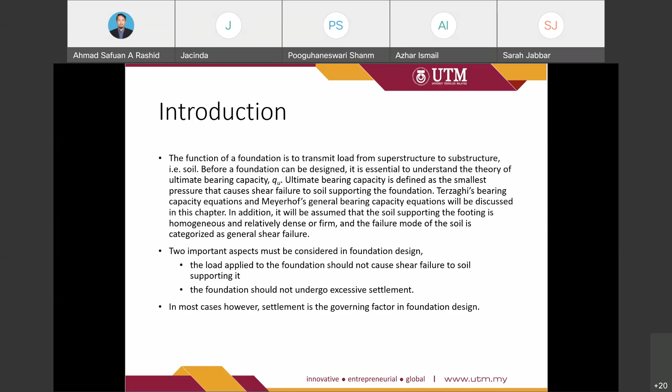So the static bearing capacity of foundations has been extensively studied and reported in the literature. However, foundation can be subjected to single pulse dynamic loads which may be in vertical or horizontal directions. So the dynamic load due to nuclear blasts are mainly vertical, and from the earthquake, the horizontal dynamic loads on the foundations are observed.

This type of loading may induce large permanent deformation in foundations. Isolated column footing, strip footing, mat footing, and even pile foundations all may fail during seismic events. Such failure are generally attributed to liquefactions. The meaning of the liquefaction is a condition where the mean effective stress in a saturated soil reduces to zero, so it means that the soil will behave like a liquid or like water, because the effective stress is reduced to zero.

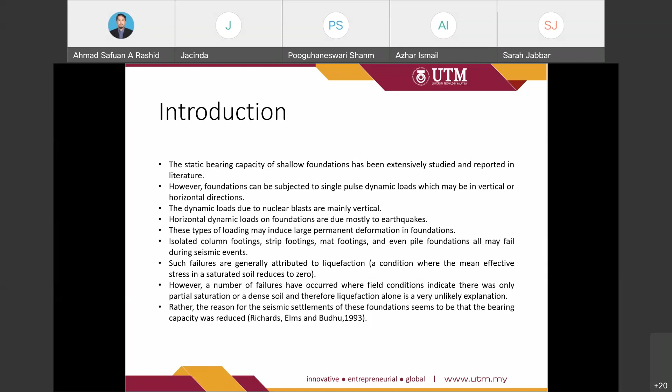So, in order to design, which is related to the seismic, so we need to have some changes on the soil properties itself, whereby we can increase the bearing capacity later on.

Though a large amount of information on dynamic bearing capacity of foundations is available in literature, it is mostly based on theoretical procedure and not supported by field data. So there is a lack of information on dynamic bearing capacity study. However, one must keep in mind that during the analysis of the time-dependent motion of the foundation subject to dynamic loading, or estimating the bearing capacity under dynamic conditions, several factors need to be considered. Most important of these factors are the nature of variations of the magnitude of the loading pulse, duration of the pulse, and strain-rate response of the soil during deformations. All of these factors have been included in the explanation and justification by Das, and in that sense he came up with some modifications.

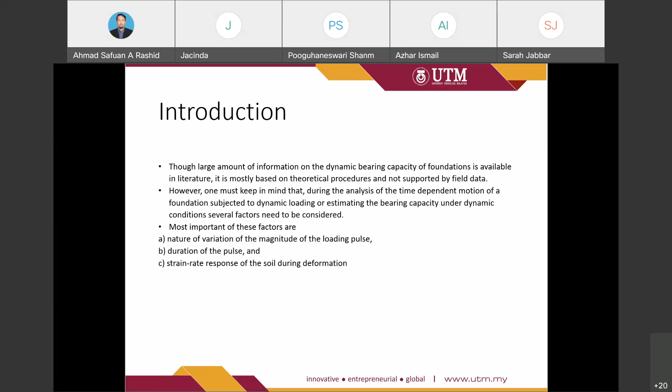These modifications are on the soil properties, for example on sand and also on clay.

So this is a brief explanation on shallow foundation. A shallow foundation is the foundation whose depth below the surface, Z, is equal to or less than its least dimension. Z is the depth while B is the dimension of the foundation. So B is greater than Z, meaning the effective area on shallow foundations is not greater than B.

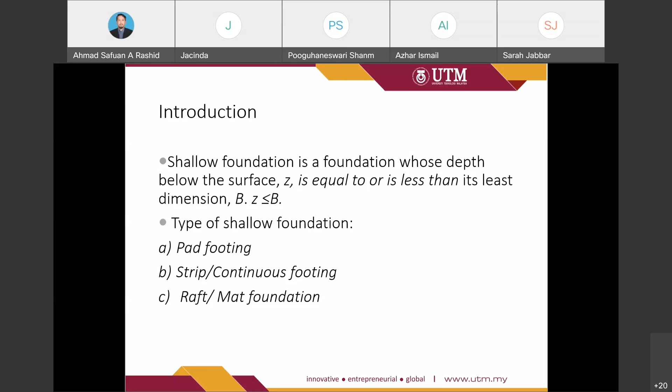So the types of shallow foundation: here we have pad footing, strip or continuous footing, and raft or mat foundations.

For the pad footing, it is generally an individual footing designed to carry a single column and its loads, although there are occasions where the pad foundation supports two or more columns.

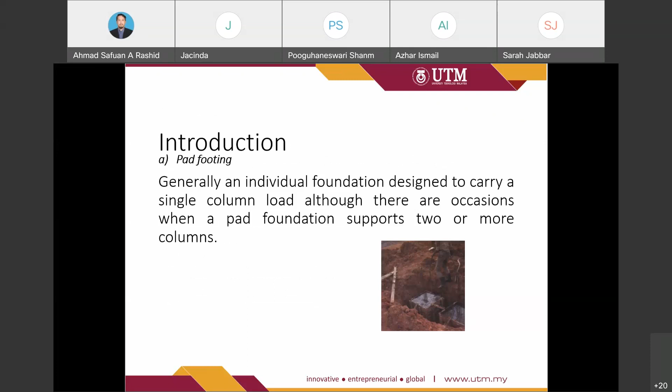Then we have strip or continuous footing. Often termed a continuous footing, this foundation has a length significantly greater than its width. It is generally used to support a series of columns or a wall. That is the strip footing, because in Meyerhof or Terzaghi's equations, the equation is based on the type or shape of the foundation. So either pad footing or strip footing will have their own different types of equations.

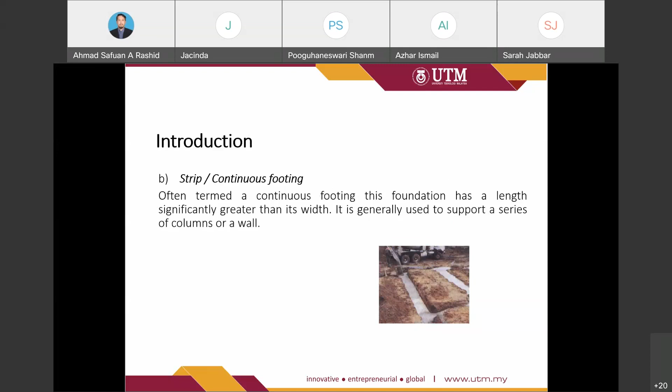However, for the mat or raft foundation, I guess it has been discussed by Prof. Khairul previously. There is a generic term for all types of foundation that cover a large area - a raft foundation, also called a mat foundation.

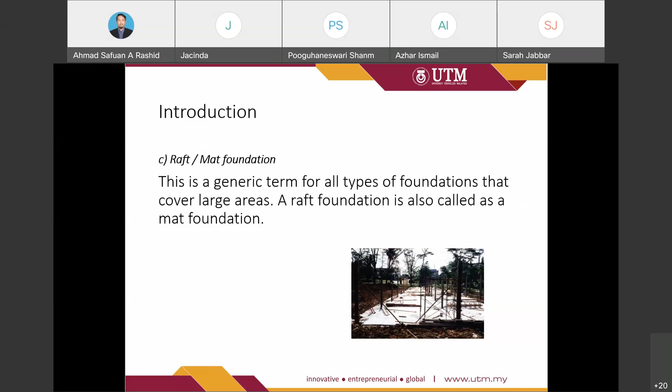Factors in the design: adequate depth, limiting settlement, safe against shear failure. This is the common type of factor that needs to be considered in shallow foundation design.

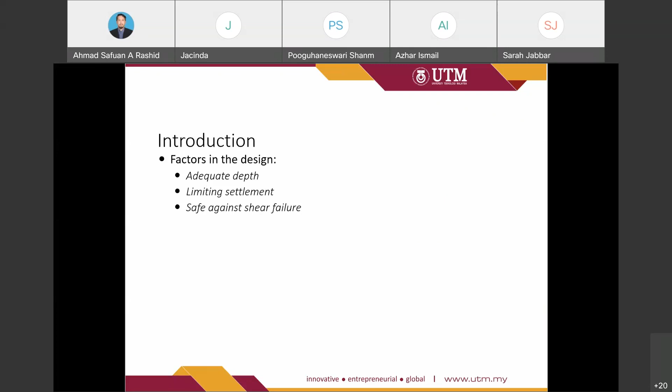Adequate depth: the depth of the footing must be sufficient to prevent any changes in surface conditions, horizontal load, and strong overturning moment. So there will be some conditions, especially in areas that experience negative temperature, to prevent frost action and volume change effect. The depth of the foundation should be more than 1.2 and 1.5 meters respectively.

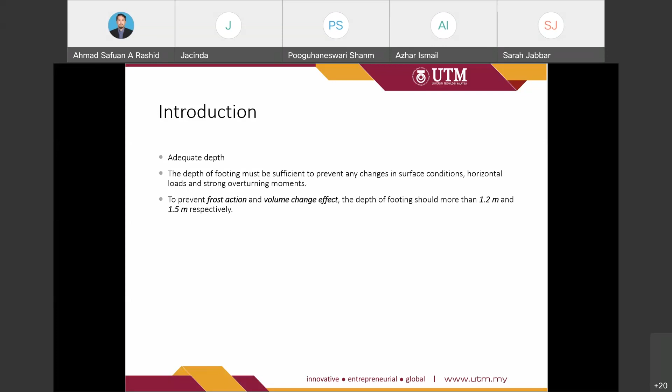So this is some value for the limiting settlement, the guideline by Skempton and MacDonald in 1956, where for sand the maximum total settlement should be less than 40, and for clay should be less than 60, for shallow foundations.

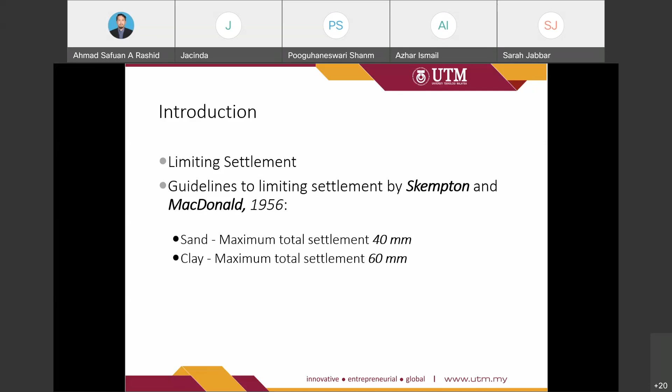Safe against shear failure - this is to prevent any failure. Shear failure occurs when the soil divides into separate blocks or zones which move fully or partially and tangentially with respect to each other along a slip surface. Conventionally, the factor of safety used in design against shear failure is more than 3.0, based on the typical type of design.

When it comes to EC7, there will be slight changes in the factor of safety value, or in terms of their approach. I will try my best to share it in the next following class.

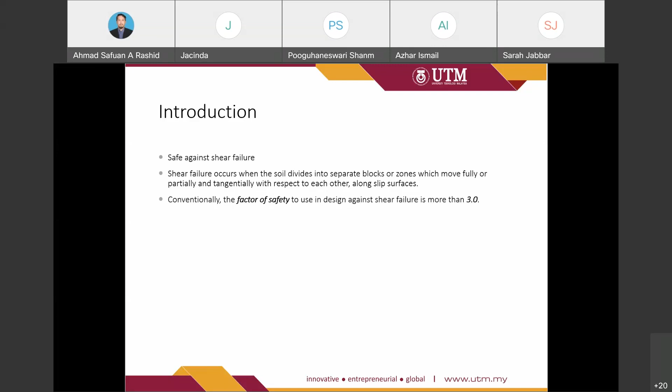So this is a type of mode of shear failure.

Actually this is one part of my PhD study. I'm using a digital camera, a DSLR, to capture the soil movement. During the loading process, we capture at least 1 frame per second, until it reaches 20 millimeters of displacement, which is 0.2, or 20% from the footing width.

Then from this study, I came up with the vector observation by using particle image velocimetry methods. By the use of MATLAB software and some algorithms that have been developed, I came up with this kind of shear failure mode patterns.

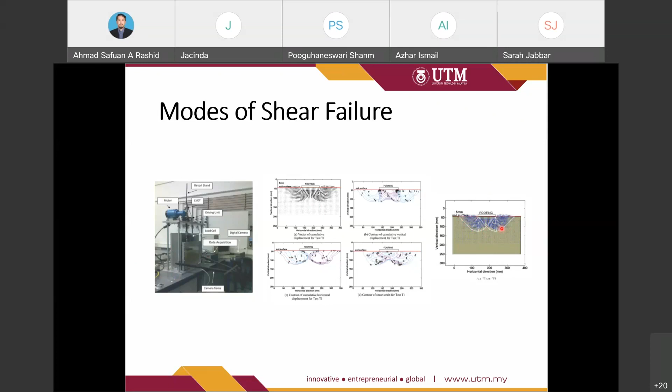So this is the common type of general shear failure for a homogeneous and firm material. This occurs when a clearly defined slip surface forms under the footing and develops upwards towards one or both sides and eventually to the ground surface.

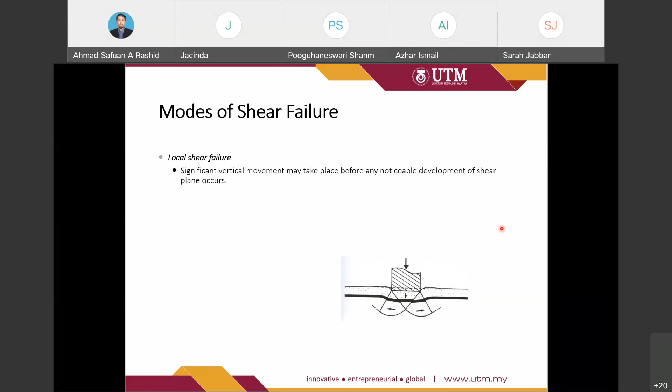So there will be two more types of shear failure. They call it local shear failure, where significant vertical movement may take place before any noticeable development of the shear plane occurs. This is normal for material that is not dense or packed well.

So then we have another type, punching shear failure. This is downward movement of the foundation caused by soil shear failure occurring only along the boundary of the wedge of soil immediately below the foundation.

So this is more related to what we call a multi-layer soil condition, which normally happens when the soil is loose, and then there will be an underlying soil that has very dense compact conditions.

Doctor, in a sinkhole, can we consider it as punching shear failure?

A sinkhole in limestone is quite direct. Like a sinkhole, the soil suddenly dissipates beneath the ground, and then anything on top can be vertically moved downward in a quite immediate manner.

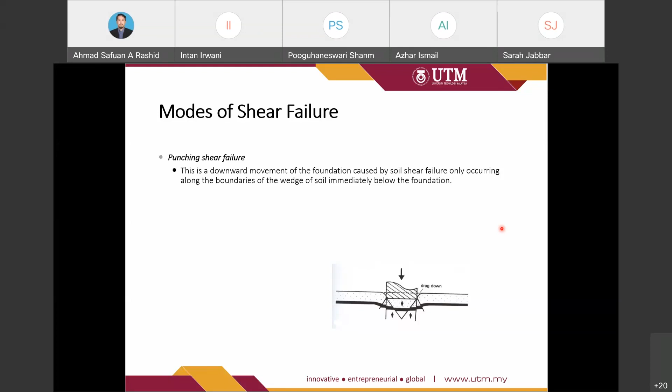So in EC7, they also include the eccentricity and the inclination factor in the one equation. So we may explore this in the next class.

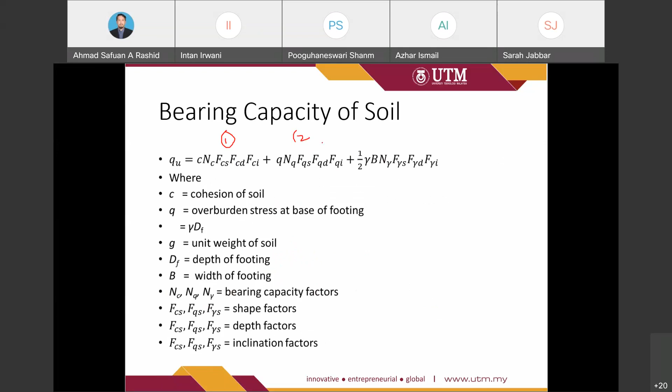So if we can draw, this value is C, and this value is gamma, while this value is gamma for the Q, and this value for gamma for the next. So this is the first sub equation, this is the second sub equation, while this is the third sub equation, the Meyerhof equation. So this is the first, second, and third.

So this is one example, just to recap again on what we understand about static load. Consider the diagram of a shallow foundation as shown. Calculate the allowable bearing capacity using the Meyerhof equation for the following condition, assuming vertical load will be applied. Use a factor of safety of 3.0.

So the first groundwater table is at the base of the footing. The groundwater table is 1.3 below the ground surface. So the second one - if 1.3, this will be 0.5. So the first one is at the base, the water. The second one is 0.5 below the footing.

So there will be a difference of approach if we have a groundwater in the ground. We need to use three different approaches actually. The reader is reminded that the presence of the water table will require three different situations to be considered in calculation. These considerations are applicable to both Meyerhof and Terzaghi bearing capacity.

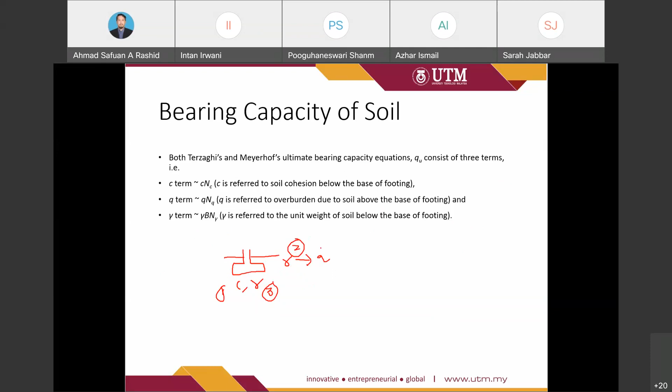The water table is located below the base of the footing and the distance d between the water table and the base is greater than the width of the footing b. The groundwater table does not affect the bearing capacity. So if greater than b - for example if it's located here, where the depth is greater than b below the base, there's no need to consider the effect of the water level.

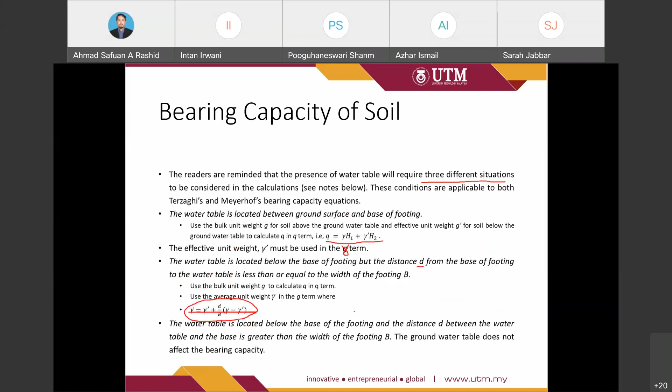This is some of the calculation for these problems. So first we need to determine - sorry, this is phi. This is 40, NC obtained from the table. So obtained is NC 75.42, NQ 64.30, and gamma is 109.60. Then we just calculate all the equations here for the shape factor, FQS, F gamma S.

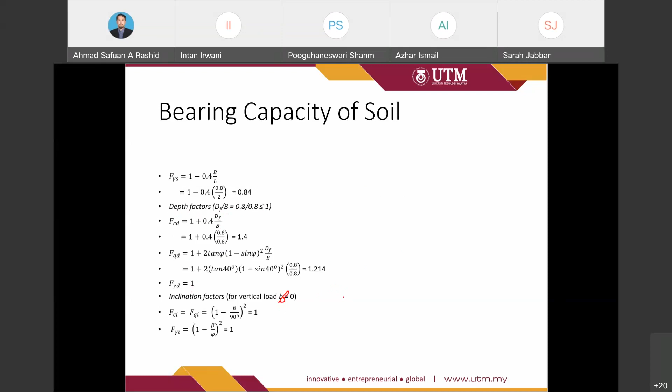Then we need to choose which equation for the depth factor. For this case, df over b is less than or equal to 1. So then we use this equation to get the depth factor value and also the inclination. Because beta is 0, there is no inclination. So FCI, FQI and gamma I is equal to 1.

So later on there will be a slight change on the gamma because the water is at the base of the footing. There will be no difference for this one because it is at the base, not between what we call the surface and the base. So no need to have changes for this unit weight - we use 17.5 as usual.

So there will be a difference for this one - we need to use the effective stress value, which is 19 minus 10. 10 is the unit weight of water, unit weight of water is equal to 10. Or if you want to use 9.81 or 9.1, it's still acceptable, but to make it easy in the calculation we use 10. So later on we obtain 582.5 for the allowable or design load after dividing by factor of safety of 3.

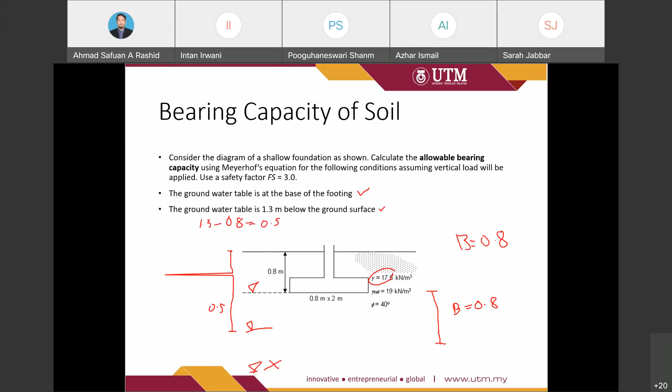0.5, and then over 0.8 is the width of the footing. 17.5 is the value for the unit weight of the soil above the groundwater level, minus the effective unit weight, which is 19 minus 10, so we come up with 14.31.

So the QU is equal to 1987.01. Then divide by 3, from the factor of safety, and obtain 657.67 for the bearing capacity of the soil for case number 2. So that is for the static load.

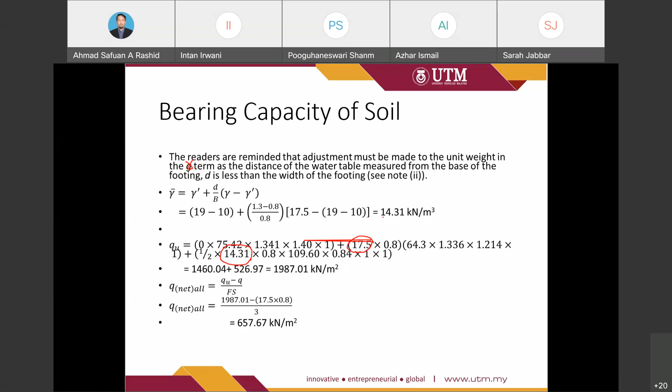Now we move to the dynamic load. We go for the sand first. This is the common type of equation from Meyerhof. In sand, C is equal to 0, so we can eliminate the first part of the equation with C. So it becomes like this.

So what will be the difference between the static and the dynamic? It's a very straightforward explanation, based on previous research carried out by some researchers. This is the same NQ and N gamma that will be used for the dynamic as well. It just has a change of the phi value.

So the preceding equation for static ultimate bearing capacity evaluation is valid for dense sand, where the failure surface in the soil extends to the ground surface, as shown in this figure. This is what is referred to as the case of general shear failure. However, if the relative density of the granular soil, RD, is less than about 70%, local or punching shear failure may occur.

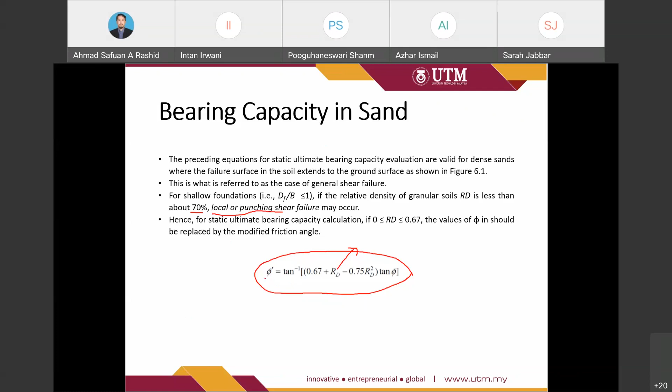So then after we do the correction, we obtain the new friction angle, but this is still under a static approach. This effect corresponds to a decrease in the angle of friction of soil by about two degrees when the loading velocity reaches a value of about 50.8 times 10 to the power negative 3 millimeters per second. This refers to a researcher, though I'm not sure who, for this result.

He found that when there is an occurrence of vibration, the sand properties, especially the phi value, will be reduced by 2.

So for a typical phi value for sand, let's say 30, when the soil experiences vibration, or any magnitude of vibration, we need to reduce it from 30 by 2. So later we may obtain 28, and then there will be a difference in the N gamma, NC, and NQ, because the value has been reduced from 30 to 28.

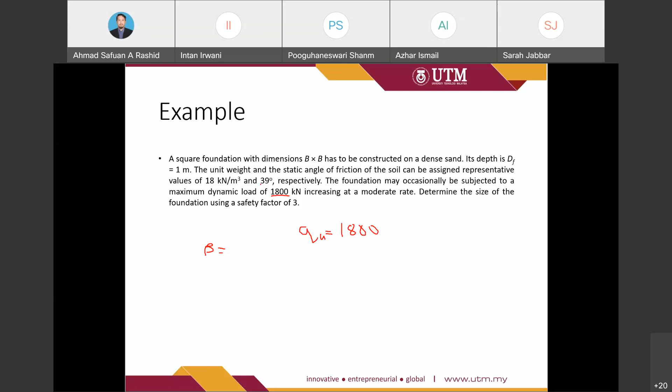The load will be represented by QU, which is 1,800. We also have been provided with the phi value, which is 39, and the unit weight of 18.

So when we sketch the problem, it will be like this, where the df is equal to 1 meter. So we need to identify the B of the square footing. The size is equal to, the area is equal to B square.

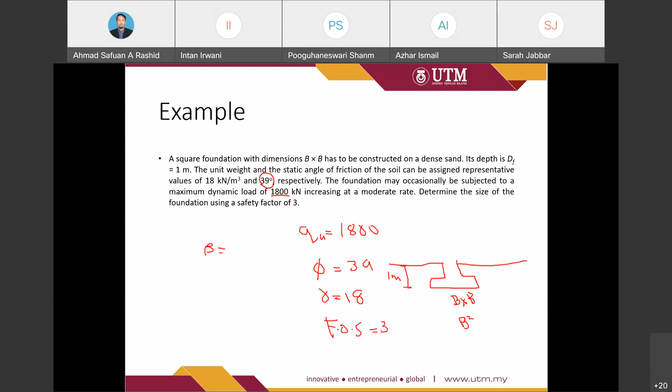The factor of safety for this case is equal to 3. Given that phi is equal to 39, in the absence of any other experimental data, for minimum ultimate dynamic bearing capacity, phi dynamic is equal to phi minus 2, so 39 minus 2 is equal to 37.

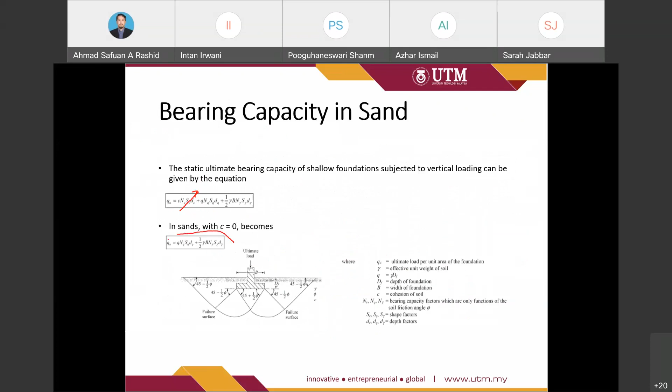So by using the equation here for the sand material, this is the equation that we may use. Before that, we need to identify what will be the NQ and N gamma.

So then include what we call the shape factor, and also the depth factor, and also d gamma, and also the inclination factor in the result.

So first we just estimate. We have two types of depth factor here. For the depth factor, we actually don't know what will be the B yet.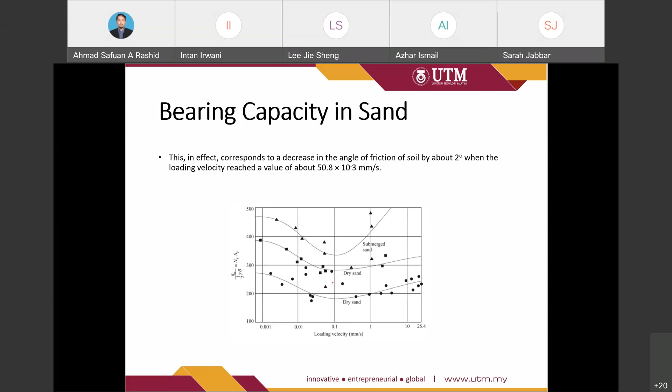Okay, thank you doctor. So that is for the sand material.

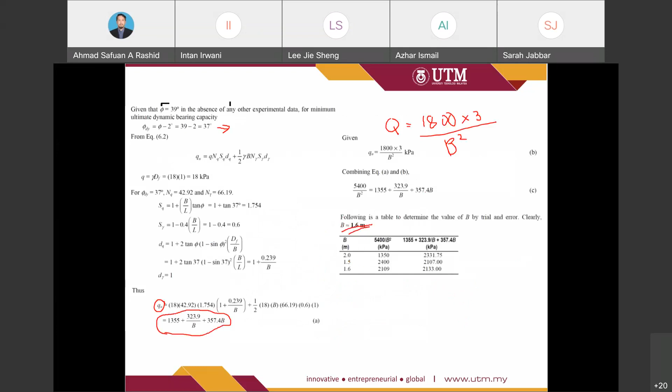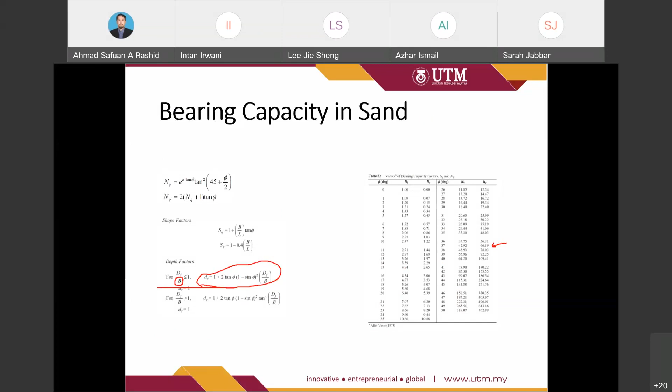So then for bearing capacity in clay, due to the phi value being equal to 0, let me check... the N gamma will be equal to 0. So only sub-equation number 1 and sub-equation number 2 will be used for these equations - there is no sub-equation number 3, because N gamma is equal to 0.

So commonly the NC is 5.14 for a pure clay without any C value, without any phi value. So the only difference between equation number 1 and equation number 2 is due to the df over b ratio. If df over b is less than 1, this is the full equation. If df over b is greater than 1, we may use the next equations.

So the ultimate bearing capacity of a foundation resting on saturated clay soil can be estimated using the equation, provided the strain rate effect due to dynamic loading is taken into consideration in determining the undrained cohesion. Unlike the case in sand, the undrained cohesion of saturated clay increases with the increase of the strain rate.

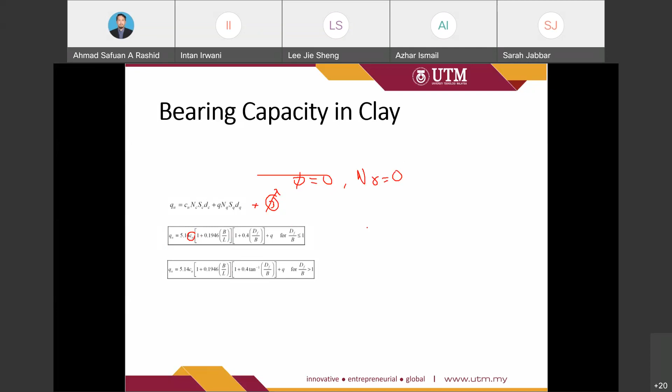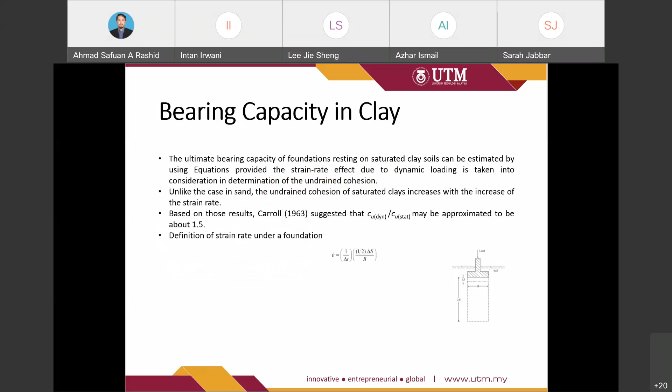So there is no example for these conditions. Now we look at the behavior of foundations under transient load.

They just want to describe what will happen if the condition of the dynamic load increases to the maximum, then has a constant dwell time, and then reduces the value with time.

A limited number of laboratory tests for observations of load settlement relationships of foundations under transient loads are available. The experimental evaluation of these tests is presented in this section. Load settlement observations of square model footings resting on sand and clay, subjected to transient load, have been presented by Cunny and Sloan, who used a model with a size of 114.3 to 228.6 millimeter square, placed on the surface of the compacted soil layer.

The transient load to which the footing was subjected, and the nature of the settlement of the footing with time during application of the dynamic load, is shown in the same figure. They recorded the footing settlement after the dynamic load was applied to the soil. The maximum settlements occur during the constant load, compared to the maximum value of the dynamic loads.

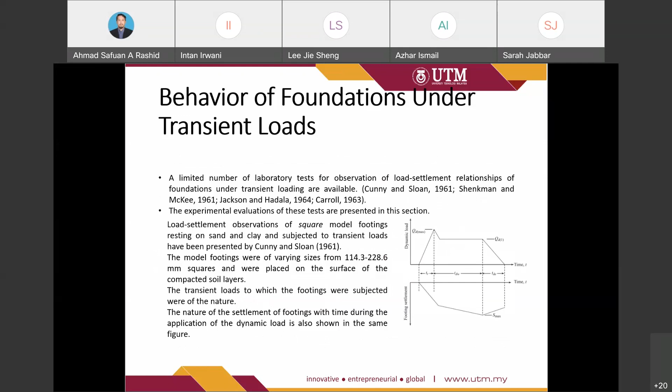And this is the result for the clay. So QU is the static value, Q max is during the maximum value of the dynamic, and QD, where's QD one, is during the dwell period. So they divide to get the difference for the clay material.

This fact shows that for a limiting settlement condition, a foundation can support a higher load under dynamic loading conditions than those observed from the static test. That finding has been made by Das, based on these transient loads.

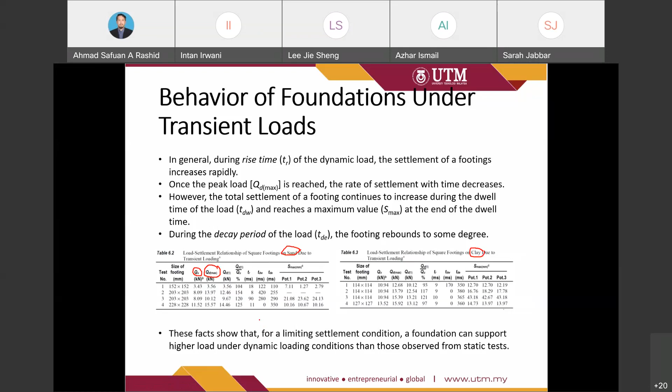Dynamic load versus settlement prediction in clayey soil. There is another study made by Jackson and Hadala in 1964, who reported several laboratory tests. This is the size of the footing, on highly saturated compacted plastic buckshot clay. That is the type of clay. The tests were similar in nature to those described previously in this section.

Based on this result, Jackson and Hadala have shown that there is a unique non-dimensional relation between QD max over B squared CU, and S max over B, where CU is the undrained shear strength.

This is based on TD equal to 0. However, for dynamic load with TD, the result will not show much difference - there will be no difference when TD is greater than 0. So this is the result during the dynamic condition, based on the pattern or graph, based on these two non-dimensional equations.

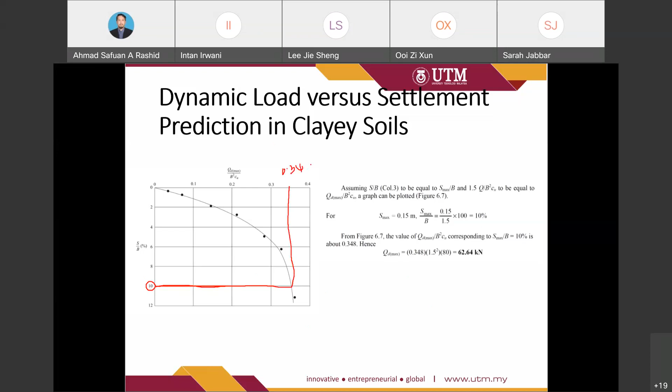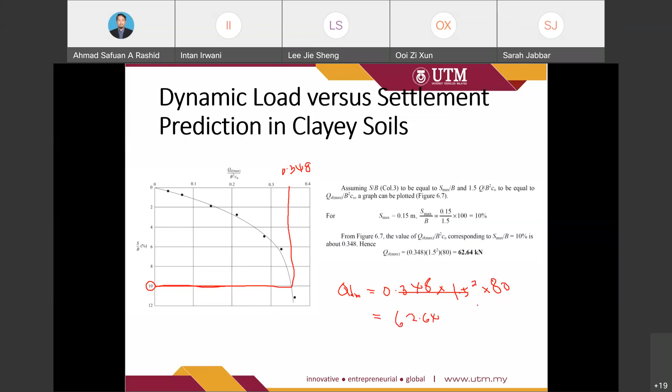So then QD max is equal to 0.348 times B square, where B square is 1.5 to the power of 2, times 80, which is the cohesion value and strength value. Then we obtain 62.64. So that is for the clay layer, clay type of soil.

Now, for the seismic bearing capacity and settlement in granular soil, this will be the last topic for shallow foundation. The figure below shows a failure surface assumed for subsequent analysis under static conditions, but this one is under earthquake conditions. We can notice here there is an E to represent the earthquake.

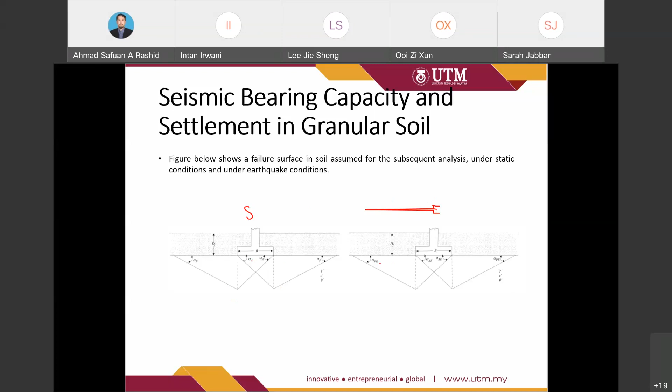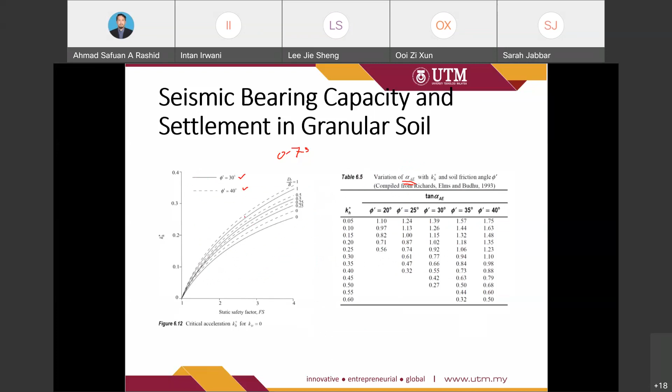Now the phi of the soil in our case is equal to 30, so the 30 is the solid line to be used, with a factor of safety of 3. So then we may identify what will be the KH value to be included in the settlement. The KH value is equal to 0.26. Also from table 6.5, by using KH equal to 0.26, the value of tangent alpha E is equal to 0.92.

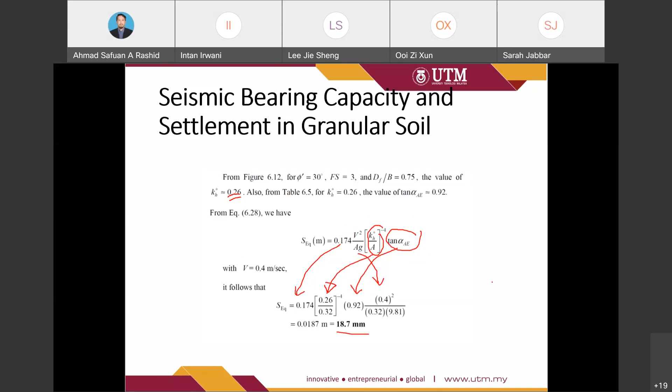So the settlement is about 18.7 due to the dynamic load. That's all for the shallow foundation.

So I finished 2 topics. Can we continue at 2 o'clock? Yes doctor. Okay so we take a rest and then we might finish by 3, or less than 3. Okay, I need to do something. By 2 o'clock doctor? Yes, 2 o'clock. Okay doctor, bye, thank you. So we meet at 2 o'clock. Okay, Assalamualaikum and good afternoon.

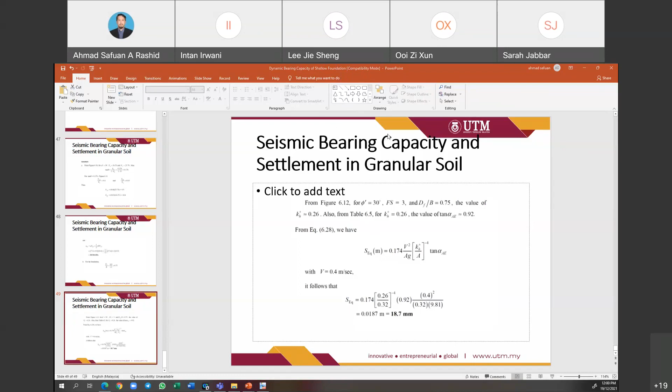Waalaikumsalam, waalaikumsalam.